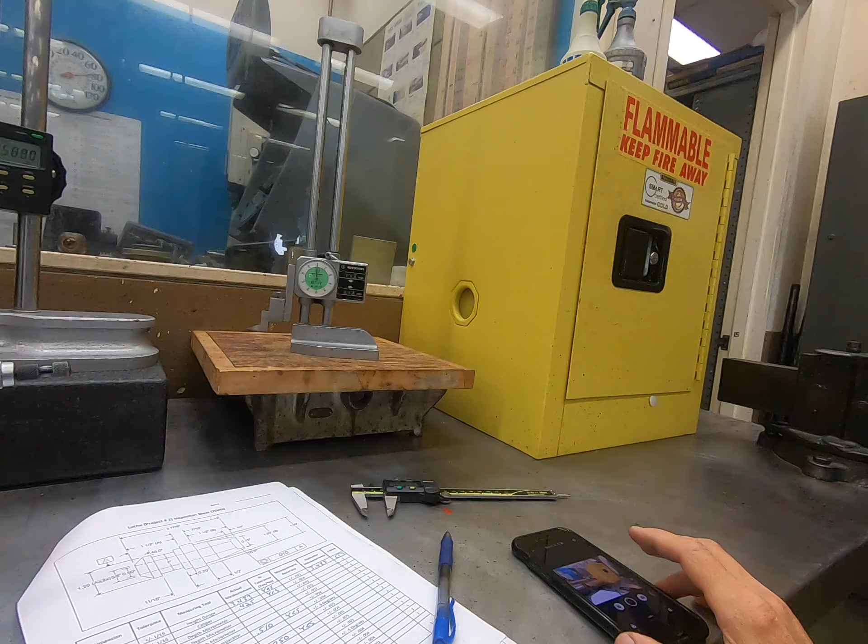Okay, so it's taken the measurement here and it's falling regularly between the 7 and the 8 right there. And again, I just was sitting down on top of there very firmly.

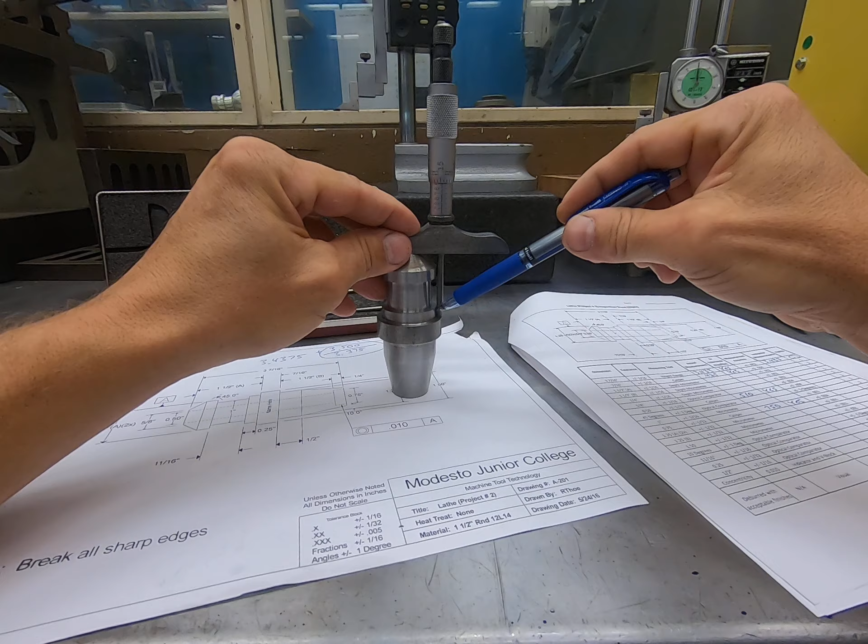The only thing to watch out for is when you're in the corner here, there is going to be a radius right in that edge. So you don't want to go all the way tight to that shoulder. You want to be out just a little bit so that you're hitting the actual wall itself, because that radius will skew your reading as well.

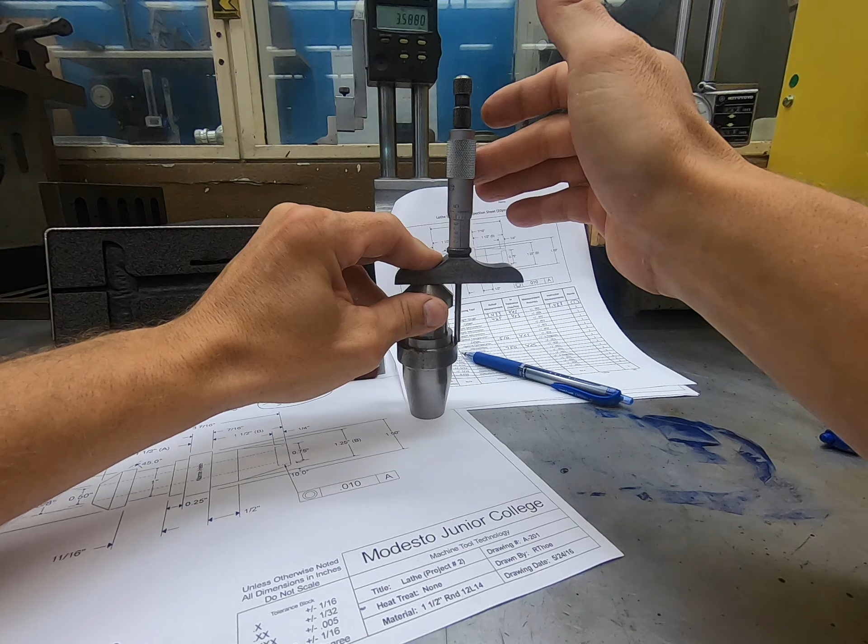So we're going to hold it there firmly. Try to get some white behind there so you can see what I'm doing. There we go, so you're just a little ways away from that wall. You're going to hold down firmly and consistently, and you're going to see it catch the same number. All right, so just under 7 is what I'm getting there.

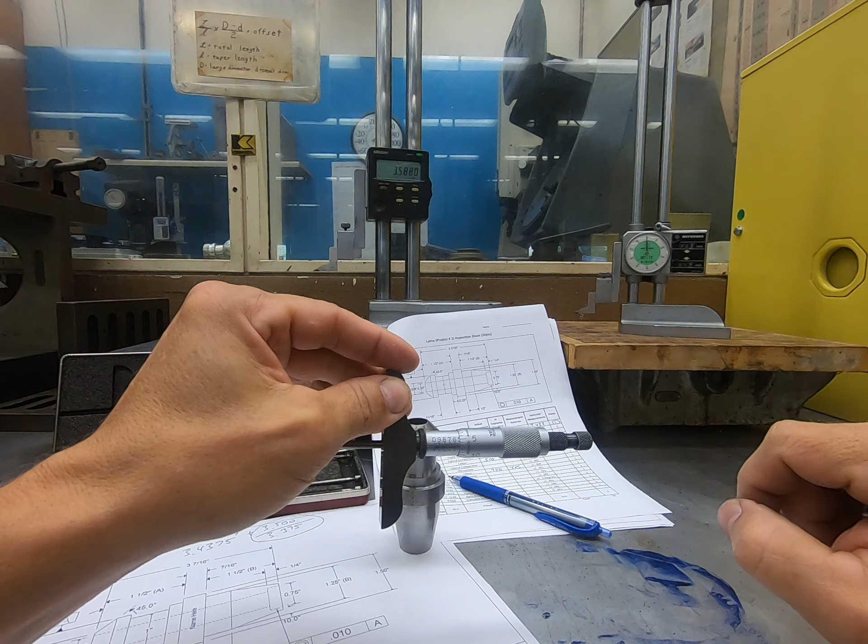So the way we read this is everything is backwards from a normal micrometer. I don't know how well you can visualize what I'm doing here, but we're past the 500, so we're at 7 right now, but 1 inch 500 is right there. So I'm just adding, and whatever's covered up is what I have to count. So it's 1 inch 500 and 7 thousandths is where we're currently at with that height.

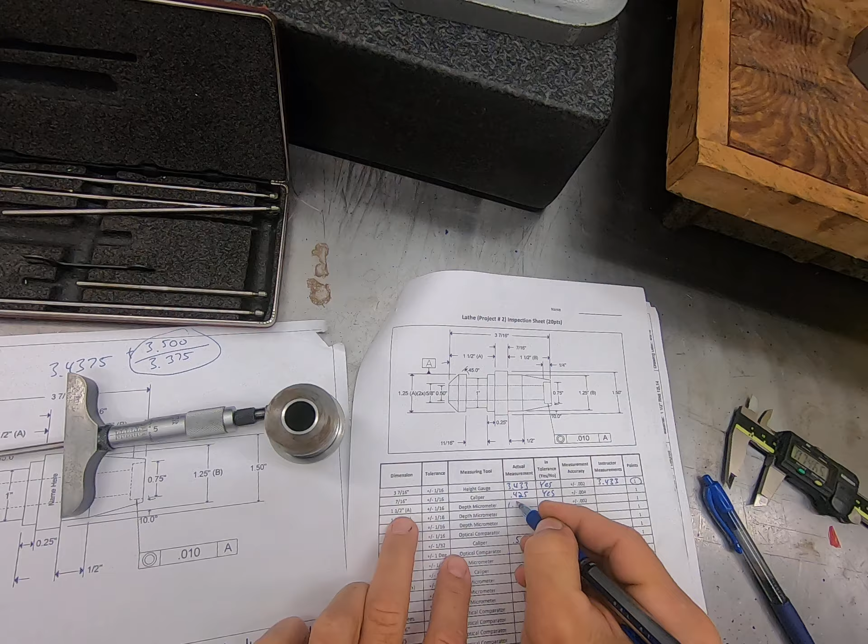So go on here, and 1.5 A, 1.507. And in tolerance, plus or minus 1/16. Yes, we're good there. The opposing side here, the same dimension, except it's coming off the opposite side.

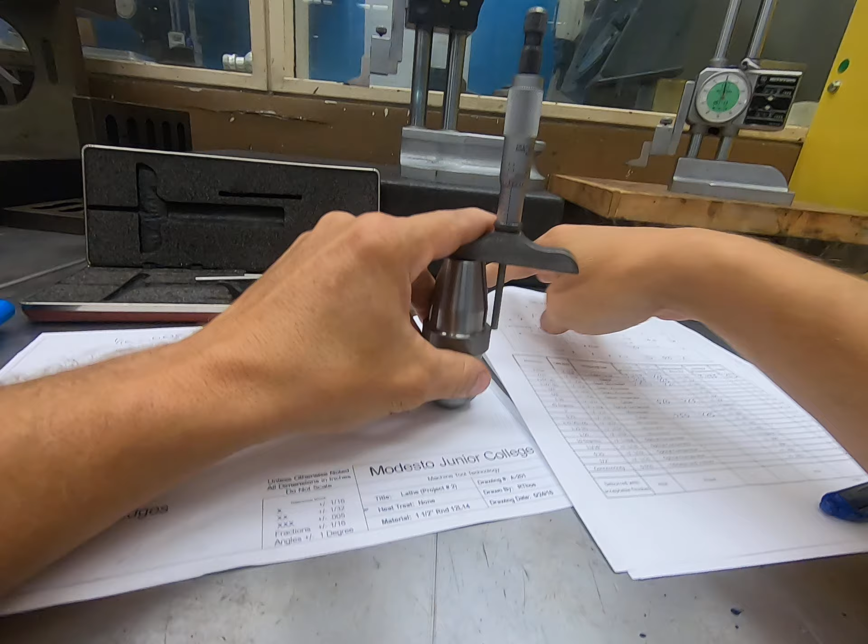Where the bore is at to that shoulder, and that's 1.5 B. So on that one, we'll do the same thing. Up against here, you can see where that shoulder is at, and we want to be away from that radius, about out to here, firm pressure, and then we look for consistency.

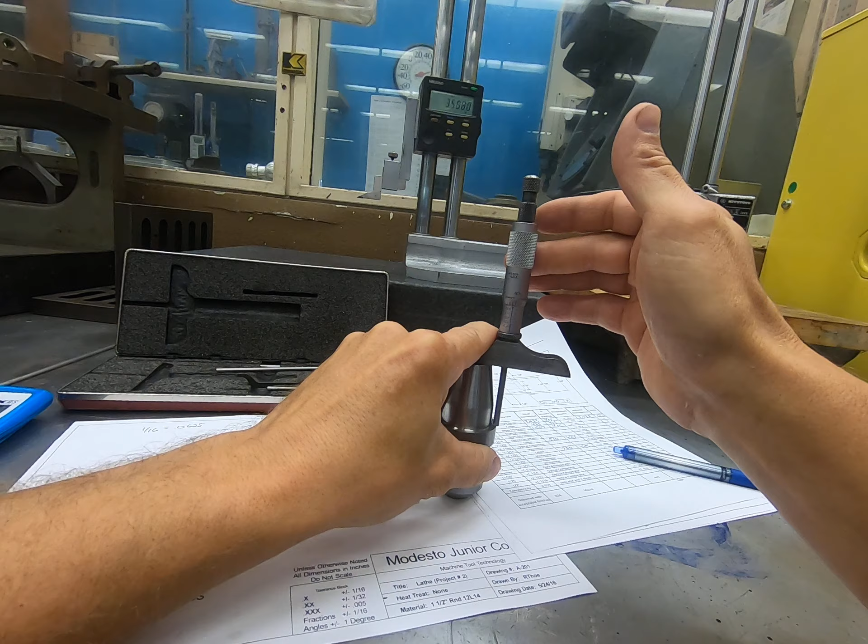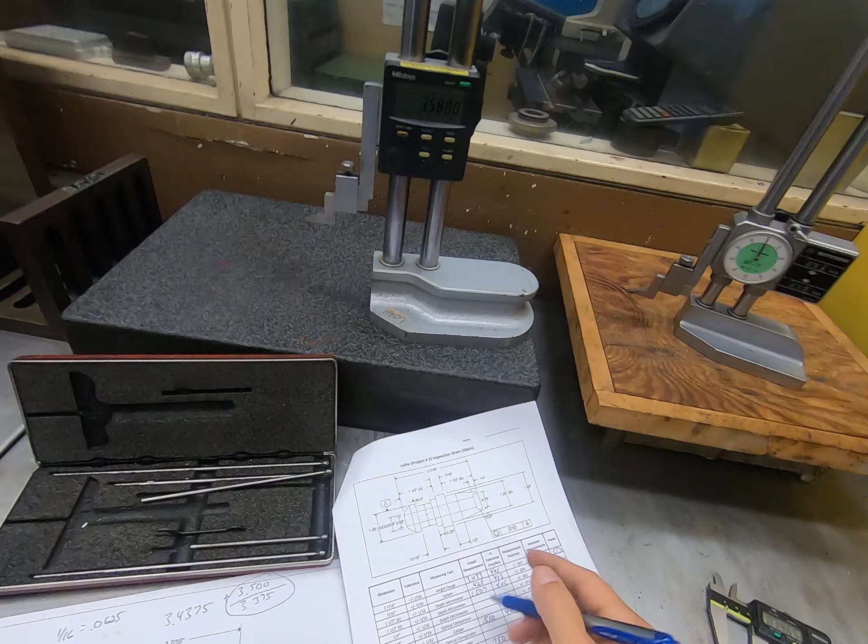So it seems to be stopping right there at about the 4. And again, 1 inch 500 is right there, so we're at 1 inch 504 on that measurement. So, 1.504, and yes, we are in tolerance.

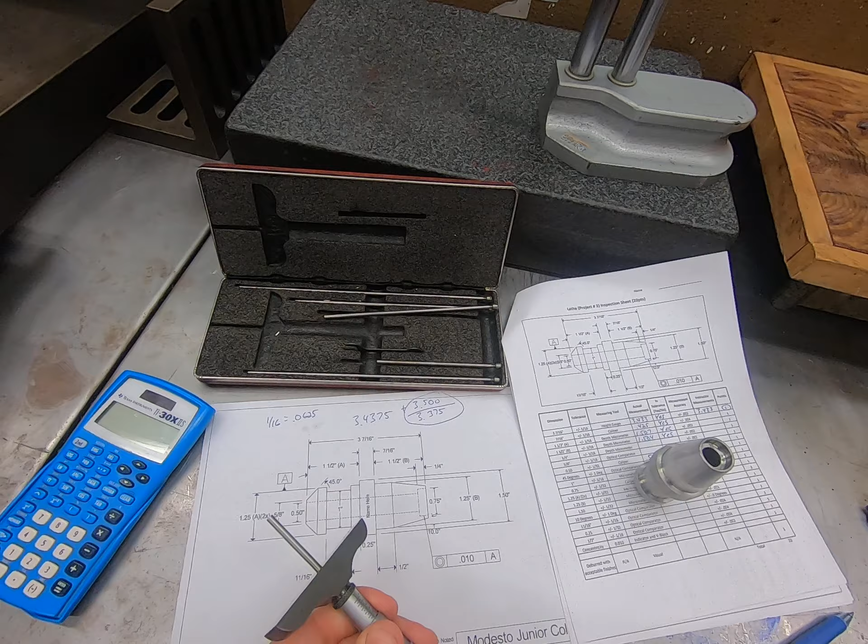Next measurement here is the depth micrometer again for 1/4 inch. The 1/4 inch is asking for the face to the depth of that counter bore right there. So we have to change rods now. We're done with the 1 to 2 inch rods. So we're going to take this out, slide that guy out, and trade it back for the 0 to 1.

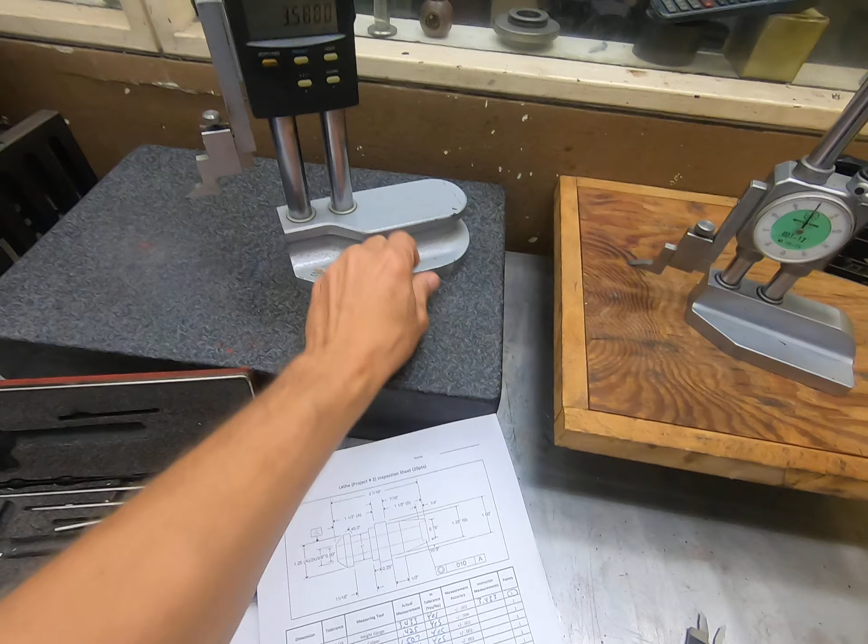And back in. And good practice here is just to make sure this is reading 0 and true, is to use like a surface plate here. So I can just go on this as a very, very flat surface right here. Make sure it's all clean. And check to make sure it actually reads 0.

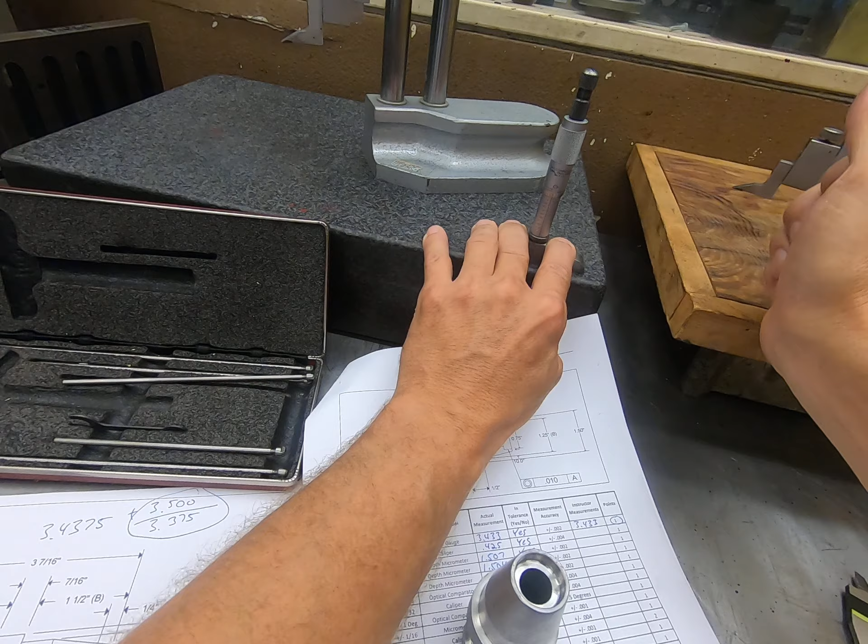So we go down, and it might be a couple tenths off, but close enough for what we're doing here. So we can see we're just looking for that 0. If this was off, you know, 5 thou or 10 thou or something, we'd have a major problem, but we're within probably a tenth or two again. So I would call that good.

So now we know that it reads 0 when that's perfectly flat. So if we go down and measure our 250 thousandths, it should measure accurately there. So again, you read what's covered up. As I'm just counting out here, I'm gonna get close. So there's 200 thousandths, because I'm right at the 2.

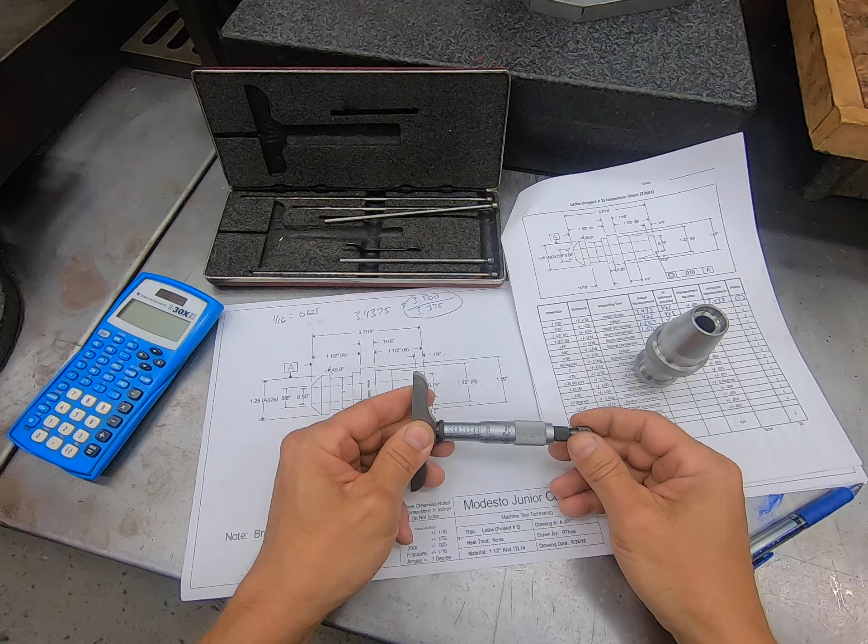This is 200, 225, and there's 250. So I'm guessing I'm gonna be close to that. So I'm just gonna start there.

I'm gonna go in. Also, again, notice you're gonna have a radius in that corner from your bore bar, so don't hit right on that corner. You don't want to be tight to that wall. You want to stand away a little bit. So I'm going to go in, instead of going tight to the edge, I'm just going to back it over a little bit, and then I'm going to get my feel here.

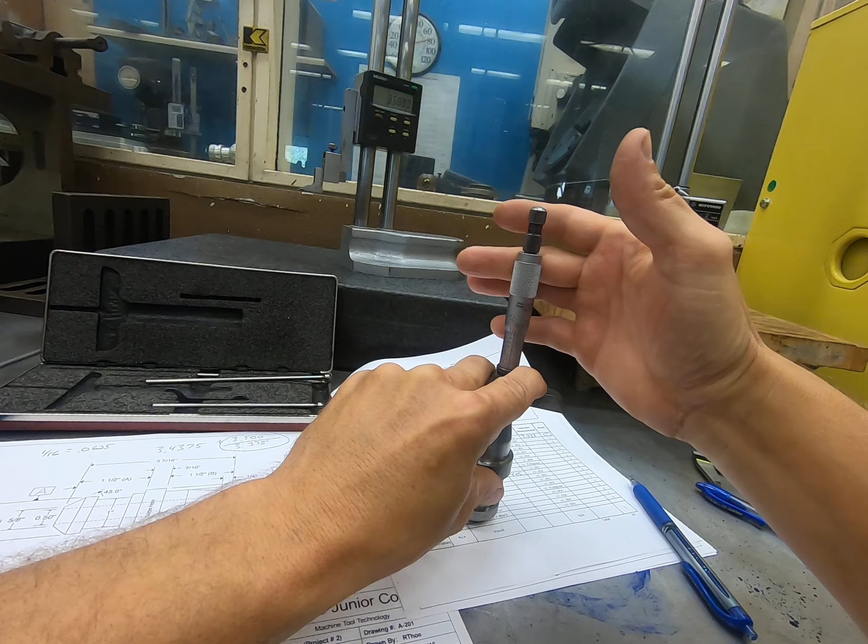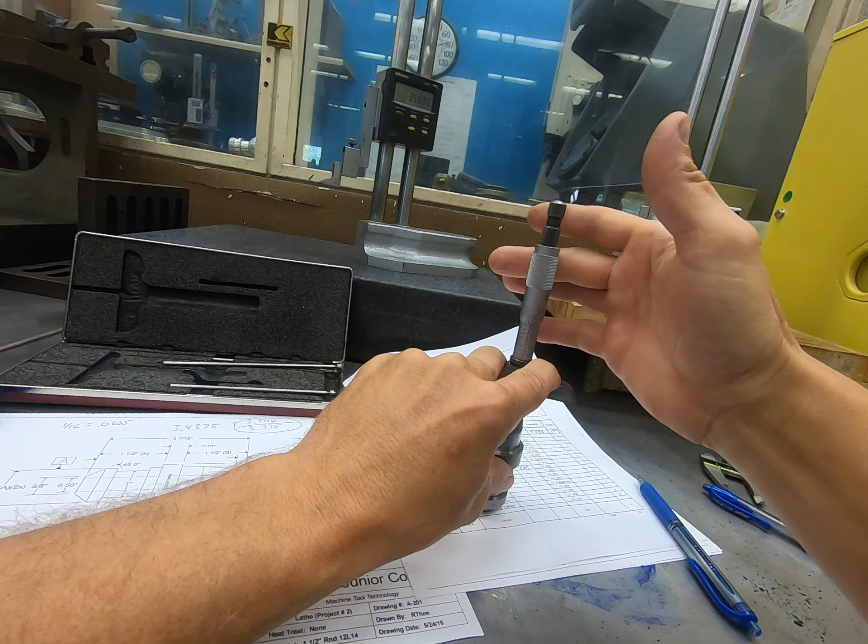And as I'm doing that, notice I'm not even using a ratchet. I'm not really a big fan of ratchets. They kind of drive it a little bit too hard. I like to go just by feel here and consistency.

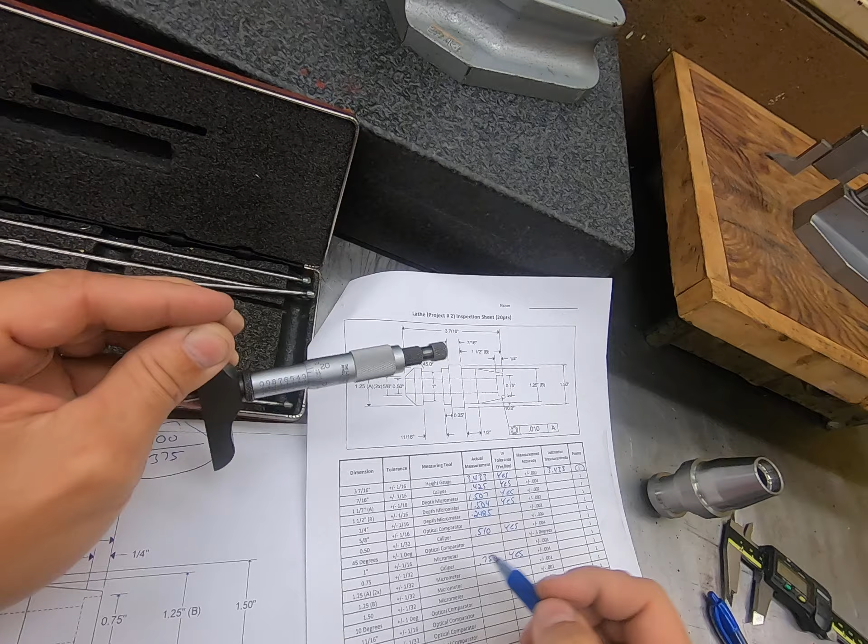And right there I'm getting just under 250 thousandths. I'm about 248.5 thousandths, 249, somewhere in there. So if I want to be particular here, I can write down and say 0.2485, plus or minus 1/16. So again, I'm good there.

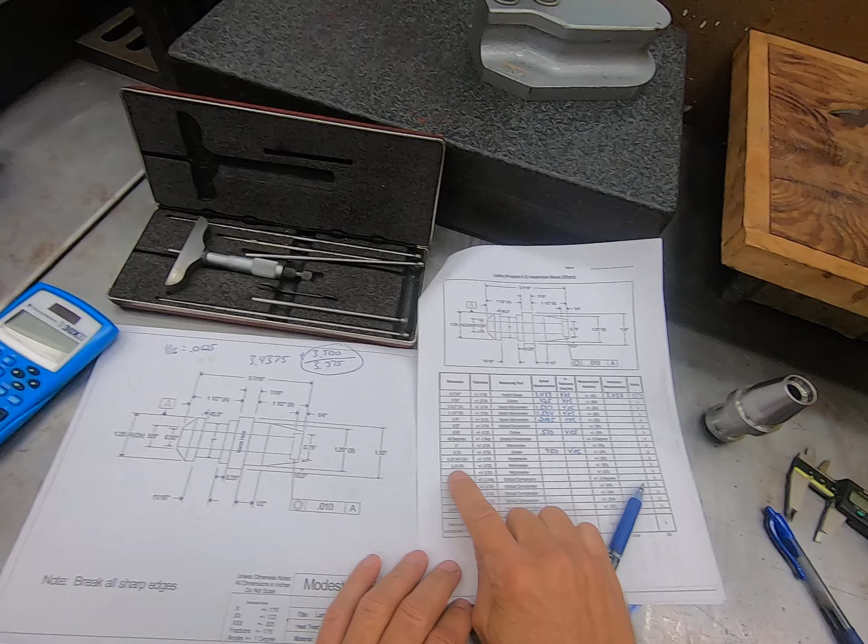All right, I think that's it for the depth micrometer here. Let's show you just a couple other measurements here. So the standard micrometer, they want us to measure the 1.25 inch diameters, that's the diameter of the flange here and the flange here, and then the 1.25 inch over here. So we're gonna do that one as a demo, and I'm gonna show you some optical comparator. The rest of this should be pretty straightforward.

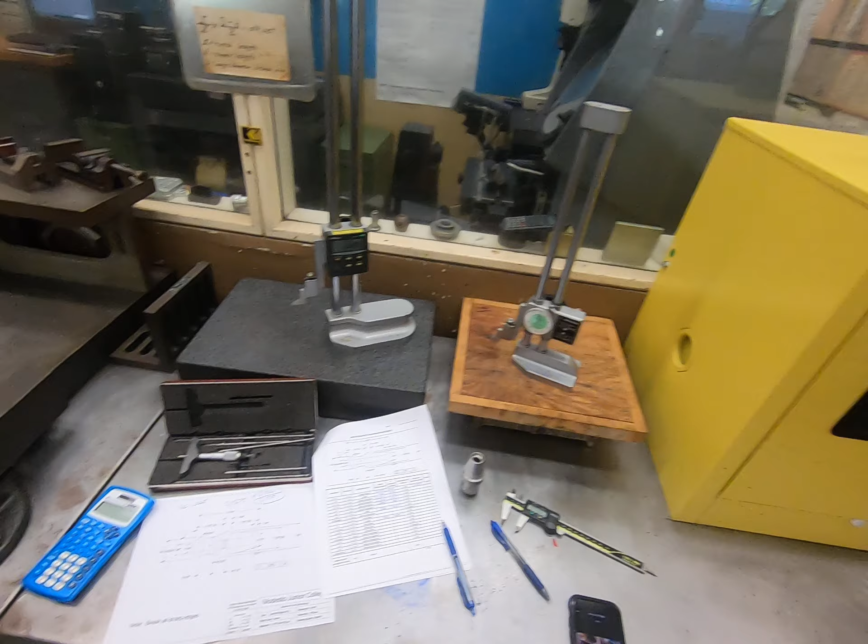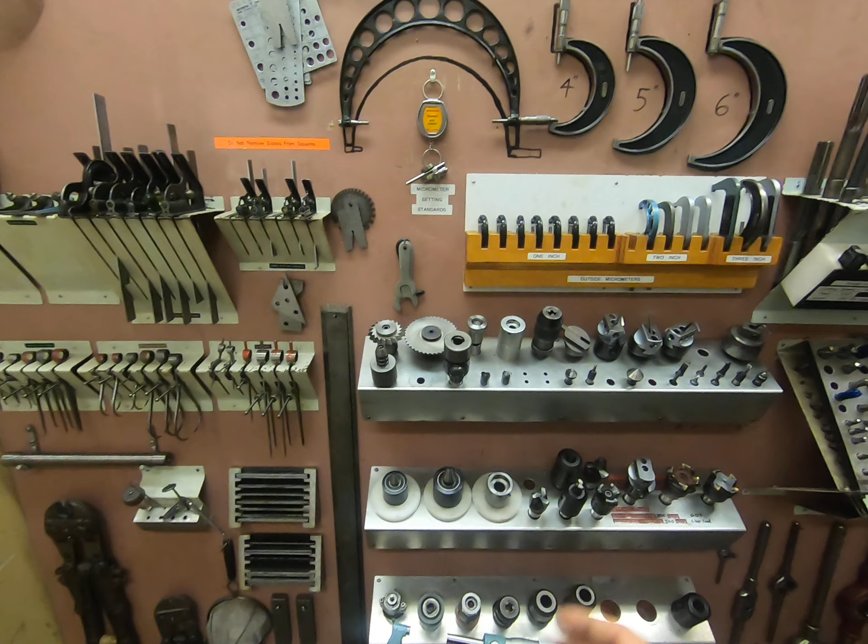So I need a 1 to 2 inch mic because I'm measuring 1.25 inches and it's over 1 inch. So go in here, grab my micrometer. And again, it's a good idea to check this as a standard. So, all right, this is a 1 to 2 inch micrometer, but I can't really zero it. But what I can do is use these standards right here. This is a 1 inch diameter standard right there.

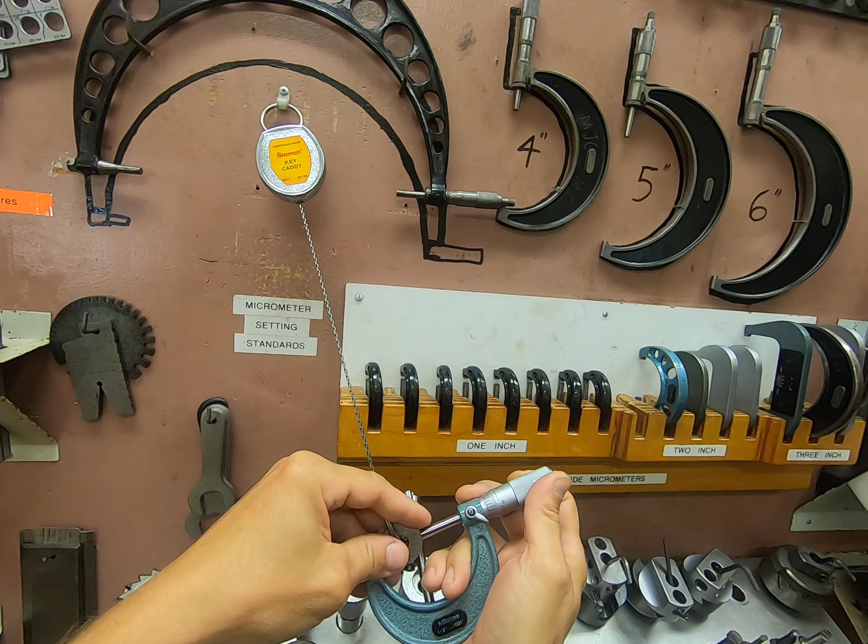This is a 2 inch length, and that's a 3 inch length. So I'm just gonna check this on this 1 inch diameter and make sure that it actually reads 0 before I go and proceed to using it. And there we are, it does read 0. So that means it's at 1 inch at 0. So I'm happy with that. It's just a good idea to check those with a standard anytime you're using the tool, just like we just did with the depth mic.

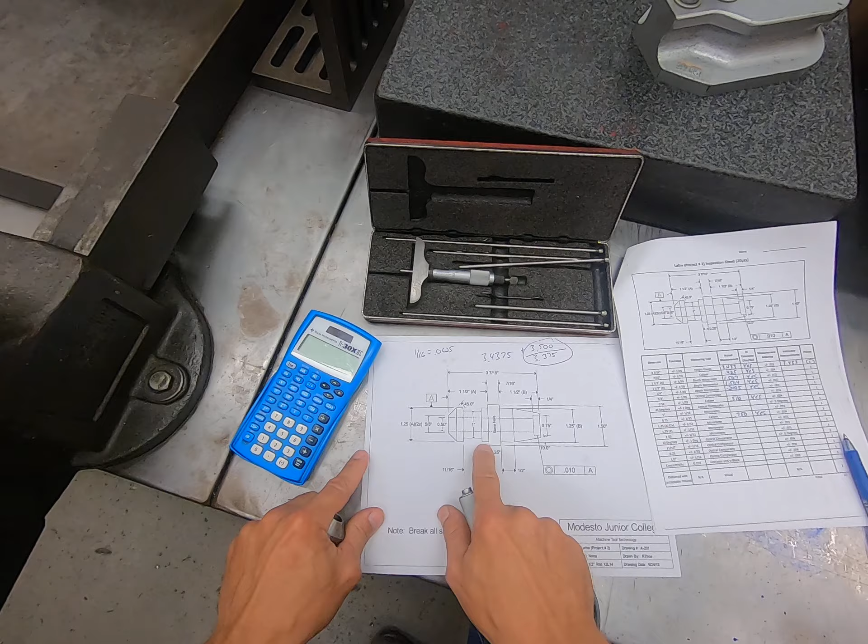All right, so now we're gonna go out to about 1.25 inches. And the first feature here was called out at 1.25 inches A, 2x. The reason it says 2x is for 2 times, being this diameter and this diameter here. So you wanna measure both of those. And you wanna watch out for any burrs on here, and I honestly do have a burr on my part, so we'll see how that measures out.

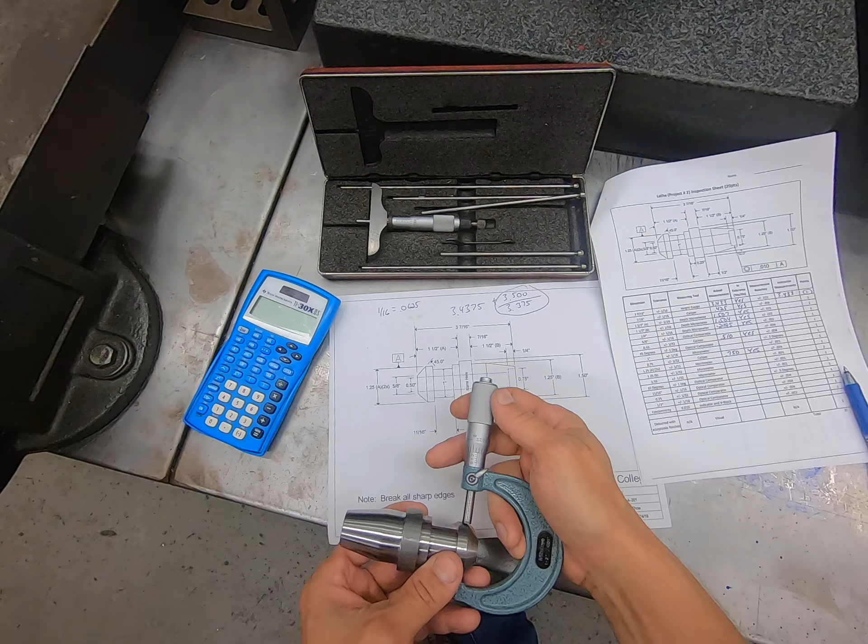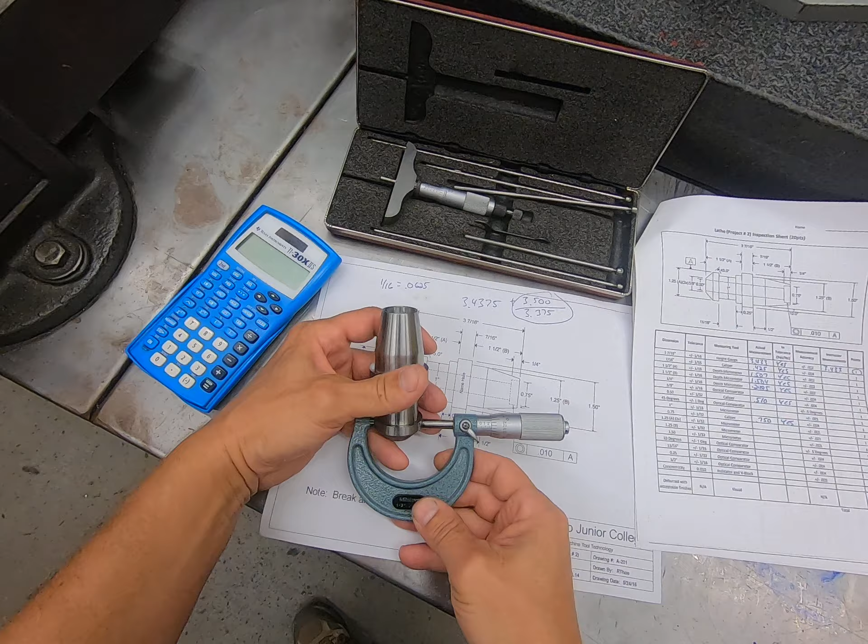And I should have deburred this better. That was my failure. So I'm gonna go here and measure that. And I like this micrometer because it's got a friction thimble, so it just slides easily instead of the ratchet. It's looking pretty good. So I'm getting about 1 inch, 1 inch because it's 1 to 2 inch mic, 247. So 1 inch 247 is what I'm getting on that diameter.

Now if I go closer to that burr, which I can feel it right there, I'm catching it. Right at this point, it measures about 248. So you want to try to measure it in the lowest spot. And really what I should do is deburr this completely so I'd get an accurate measurement.

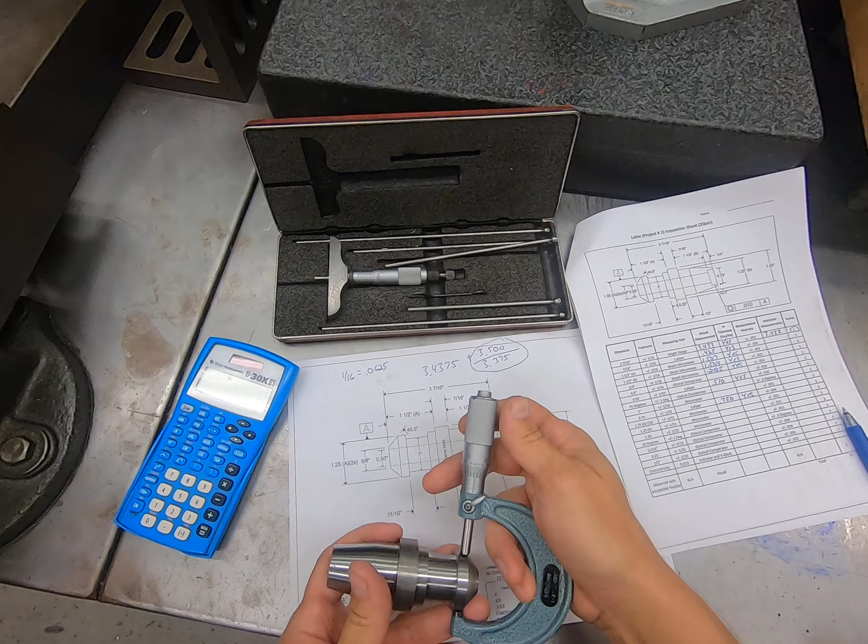So if it's on your part, I would suggest deburring that. Otherwise, your instructor's probably going to knock you off a point or two for leaving that ugly burr on there. But those will skew your reading. And you can see there, it's about 1/1000th different because it goes up and over. And it's about 1/1000 bigger right there than what it is right here. And again, you can almost hear it catch on that burr as I'm going across it.

So I'm also going to check it over on this side and over here. And again, I think I'm sitting on a little bit of a burr, but I'm getting about 1 inch 240.